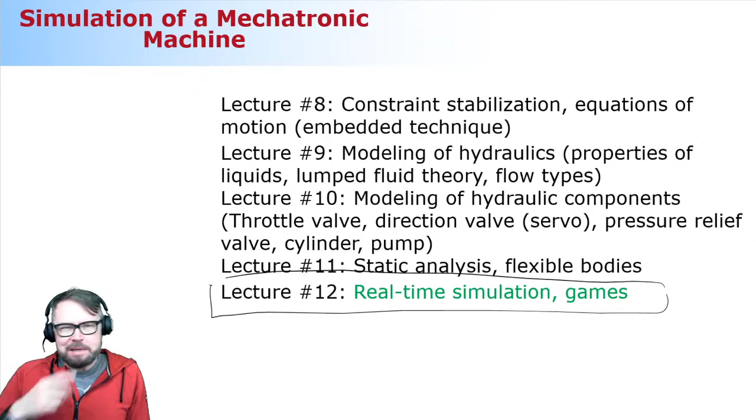Okay, with that, let's move on to a summary from last week's lecture.

Last week we looked a little bit at modeling of flexible bodies, and we concluded there are two alternative ways to do it. We can use a method that is not strictly part of flexible multibody dynamics theory, but is based on rigid multibody systems. This method is called the lumped mass approach, and as the title implies, it uses rigid bodies, lumped masses, connected together via spring elements. The spring elements introduce flexibility in all 6 degrees of freedom in a spatial case, 3 degrees of freedom in a planar case.

There are some examples showing this method applied to plates as well, but for plates it becomes very complicated because there are a lot of springs traveling back and forth with 4 bodies or 6 bodies like this.

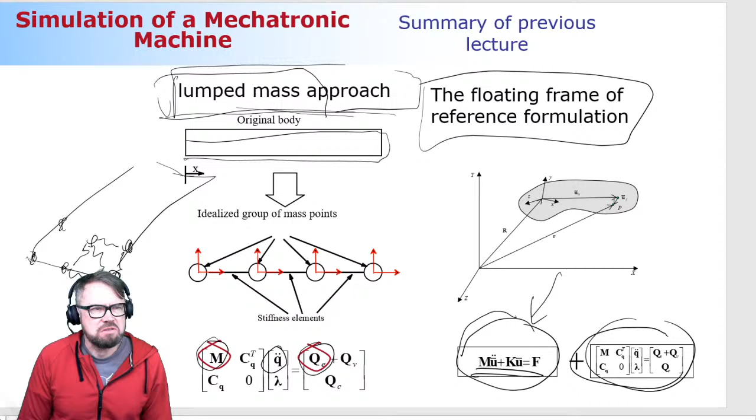Let's look at an example. Here is a beam-like structure. This is actually a hydraulic driven structure where this end is connected to a pillar body that is going downwards, and there is a hydraulic cylinder connecting the pillar and this flexible body.

If you look at the lowest deformation modes, frequency-wise lowest, they actually contribute quite a bit to how the system behaves. For example, if you conduct an eigenvalue analysis, you can see the frequency and corresponding eigenvector looks something like this - it's like a banana mode in common language. In a banana mode, this is definitely important, particularly because the system is loaded in this banana mode direction, since there's a hydraulic cylinder connected in this direction.

But when you look at another mode, this is an example where deformation is in the transverse direction. In this transverse direction, it's probably not that important for us because most of the loading will be in the direction where the cylinder is attached. For that reason, this may be a mode that you can ignore - maybe you don't need to worry about this mode at all, depending on the rest of the structure, but basically not necessarily so important. This next mode is in the same direction where the cylinder is connected, so this too is probably very important.

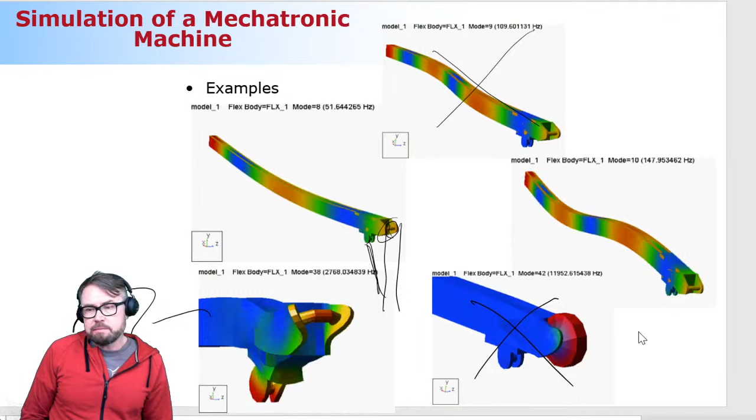This was a transverse direction, so you probably can ignore that as well. Maybe this one too. Just using a few modes, you can have acceptable accuracy - acceptable accuracy, and that's what we are after.

Recap - I have a recap, but I'm not going to get to that right away. First I want to discuss real-time simulation, but there's a practical matter, one practical matter.

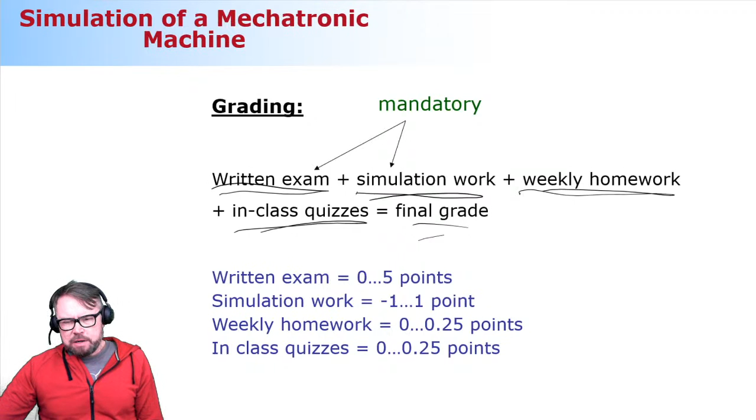Written exam, you can do in two different ways. You can participate in these 2 online midterm exams, which is what I'm highly recommending you to do. It was mentioned that the last exam is in week 51.

That's what I would like to change. I would like that to be in week 50. The reason is that if you have it in week 51, you will have a bunch of other exams, and maybe you don't have enough time and energy to focus on this exam. So I'm thinking the rescheduling makes sense. I hope you agree. If not, send me an email.

And if there are some difficulties for you to participate in these online exams, which I doubt, then the alternative - this is the first alternative. The second one is to go to the final exam. The first option is 17th of December, and then in February and in March. Those are the 3 options. Hope this is okay, and if not, let me know via email.

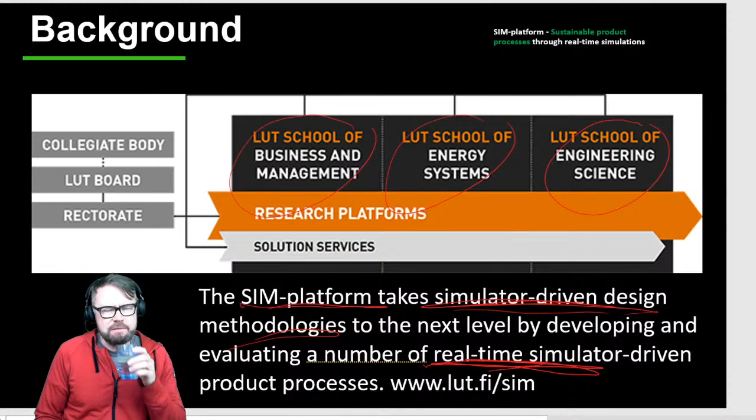This is a very pleasant topic to explain because it's very close to real life. So that's why I'm going to spend the next, I don't know, 40 or 50 minutes explaining what real-time simulation is all about and what this Sim Platform is about.

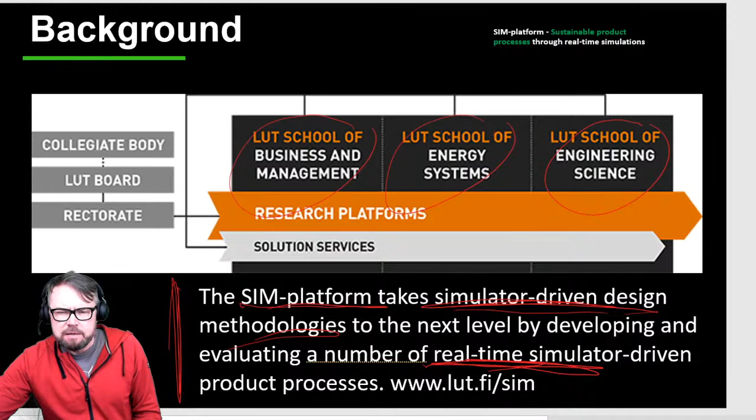Okay, so a little bit about background. This is heavily related to Industry 4.0, the fourth generation industry. The idea is that we have what's called cyber-physical systems - computer-based physics, if you want to cut corners. So the machines have their own understanding about how things are moving and what happens, and that typically is model-based. It could be some other solution too, but typically it's model-based.

If you look at the other generations of industry, those are things you're very much familiar with. Steam power, mechanical solutions - that's the first generation. Mass production, the Ford production line, electricity - that was the second generation. Computers and automation were the third generation. And now Industry 4.0 is cyber-physical systems.

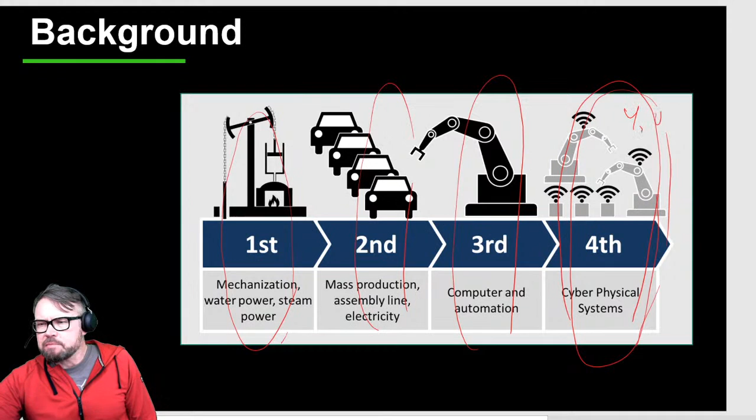So let me ask you this: Industry 4.0 is about cyber-physical systems, mechatronic systems, 4G internet connection, extensive use of electric drives - just what I explained to you. Game is on, so let me put it on Kahoot online.

Oh, it's up and running. Oh yeah, I can see that some of you already entered the answer. Let me see, game is on. 100%? So guesses are getting started from 100%. Come on, no, you can't - I don't think that's the case. So all saying 100%? I don't think so, I don't think so. There's a high temptation to make a bet that it's not 100%.

95, I like that. My guess is this: 95. You guys are all saying it's 100%.

So let me see how many students I have today - 56. What is going on here? So where are the rest of the students today? Let me see how many people are following the streaming - 65. But it should be 80 something. So where are the rest?

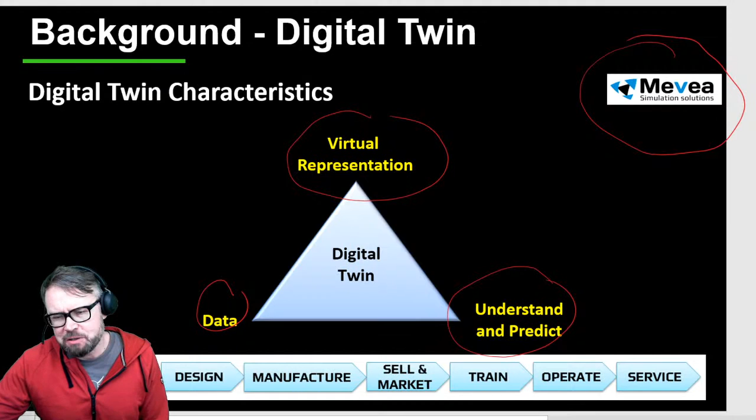Let me play the video for you and let me see how the voice is. Yeah, I hear the voice. Yeah, that's the problem, you don't hear the voice. It comes through my headset, but you don't hear it. Can I somehow fix it? No, I cannot. So you hear the sound? Oh okay, so you hear it, great.

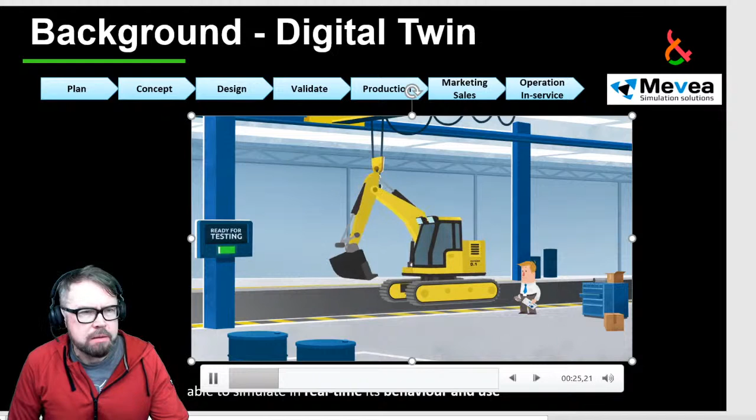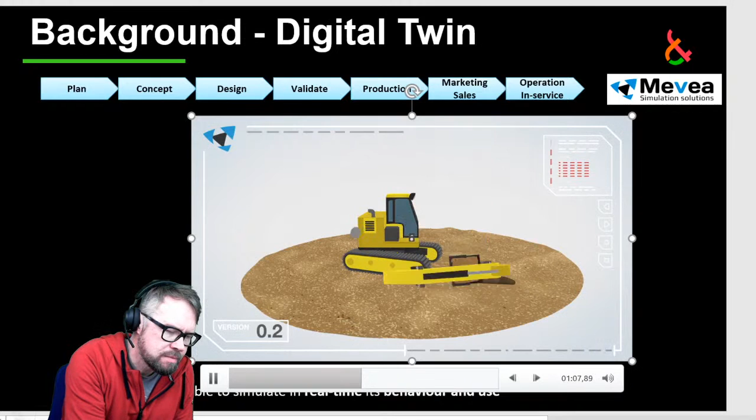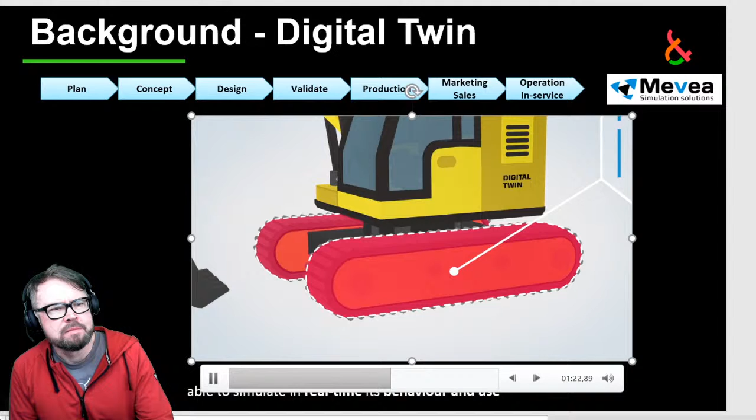Manufacturing machines can be a complex and costly process. Assembling the first prototype from parts that haven't been developed or tested together will often cause problems, and getting everything to function properly may require significant amounts of materials and effort. Nobody wants to be known as the manufacturer of poor and unreliable machinery. So wouldn't it be great if you could build your first prototype secure in the knowledge that it already has hours of thorough testing behind it? Well then, may we introduce you to Mevea. Mevea combines all plans for your machine into a single virtual model called a Digital Twin. This includes all the components necessary to build your machine, such as the interface to the real control system. The digital twin that is created is a virtual physics-based representation of your machine, capable of simulating its behavior and use in real time. The Mevea software simulates real-life physics, so the machine can be tested in different environments and on the actual tasks it's designed for. You will be able to detect potential problems before anything is even built. The digital twin can be inspected and modified when necessary, and stakeholders can also get involved in the development process at an earlier stage. The rapid development iterations that the digital twin enables will result in fewer prototypes, reduced costs, and faster lead times. Moreover, Mevea's solutions allow operators to use the simulation for training, which means they will be qualified to use the machine before it even exists. The digital twin lives and evolves throughout the life cycle of the product.

Once connected, the digital twin can analyze the machine's use and behavior in the field and provide vital feedback. This data can also be used to develop the product further. With Mevea's digital twin software, you can develop even the most intelligent and complex machines with ease, and change the way you engineer and operate your products. Read more about Mevea Digital Twin on our website.

Okay, so I take it you heard that, you were able to follow the whole story. That's great. I thought the voice was always coming to my headset, but obviously there's some secret technology that is passed by me. Anyway, so it says behavior and use in real time. Is that something that is useful for us?

Well, it actually is. We're going to look at how this behavior and use in real time can be applied in the different product processes or steps in the product processes. Those are the ones mentioned here: planning, concept design, more like product development tasks, validation, production, marketing, sales, operation, and service. Those are the things we're going to look at, what we can do with this real-time simulation.

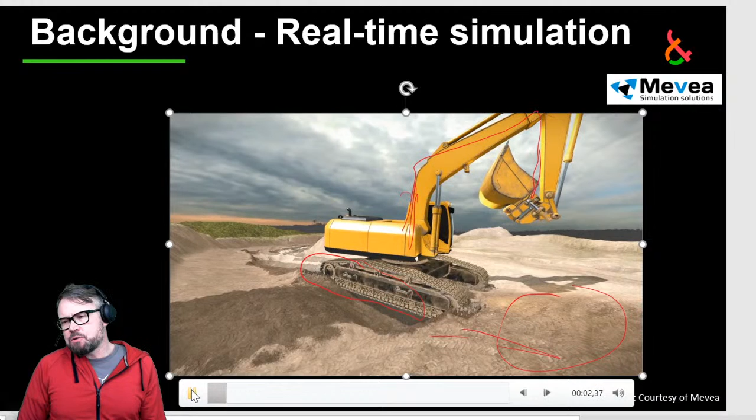This includes all the components you can find in a real machine. It comes with mechanical components, joints that are connected to mechanical components—no surprises, because it's multi-body based. Hydraulics, well, we know how to model the hydraulics. Then there are tracks, also based on multi-body system dynamics. Deformable ground, which is multi-body based. So everything is multi-body based. You just build all the necessary equations and solve those in real time. And the environment model, which this time is just this deformable ground, typically is a particle-based description, but let's see how it behaves. My drawings are a little bit disturbing, but let's see.

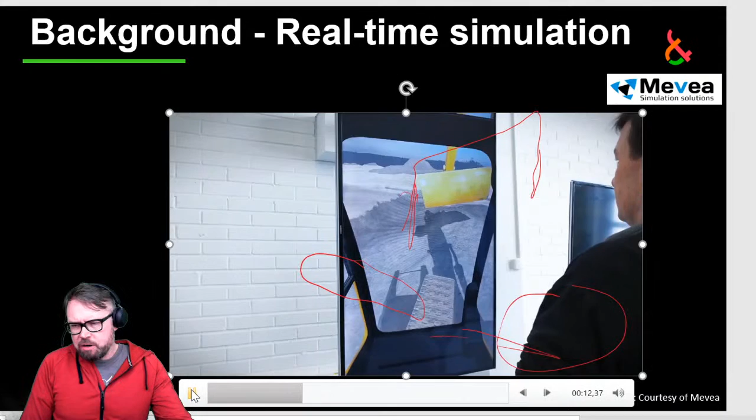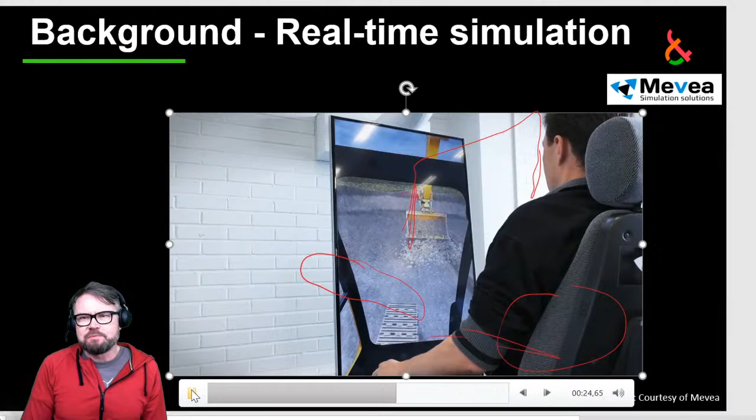Now, because the solution is real time, you can have an operator actually controlling the machine. This is very useful from many different perspectives. And what are these perspectives? We will get back to that soon.

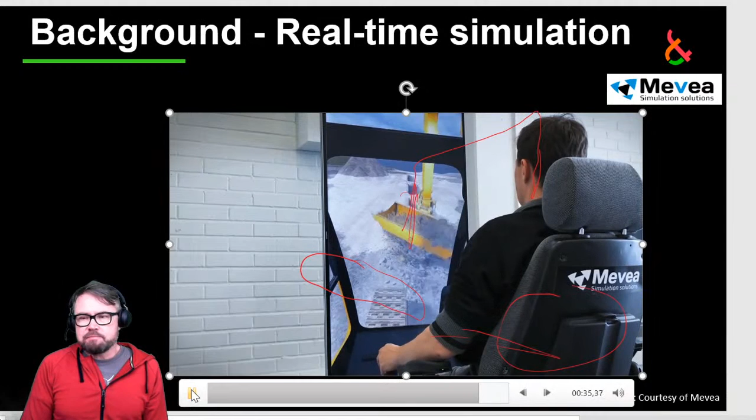There's a question in the chat window which asks: can companies build a Mevea model based on the CAD description? Yes, they can. They take a CAD description of mechanical components, combine them together, introduce the hydraulics, and that's about it. Then the model is ready.

Then, measurements from the field—how that works. I have slides on that a bit later, but it's something very exciting. We have sensors reading, say, acceleration from certain components. Those can be used as an input to our models, and the model then reproduces the motion that happens in reality. Why do we do it? Because the model gives us a full understanding of what's going on in the machine—an understanding about every single component, the full state, if you want to speak in terms of control engineering. And once we know the full state, there's a lot of things we can do with that. We can give extra information to the user, we can avoid misuse of the machine, we can use that in software development and testing, and so on and so forth. That's what we're going to look at a bit later.

So these environmental models could be based on a real environment, like this one here. I hope you hear the music. I don't speak if the music is on.

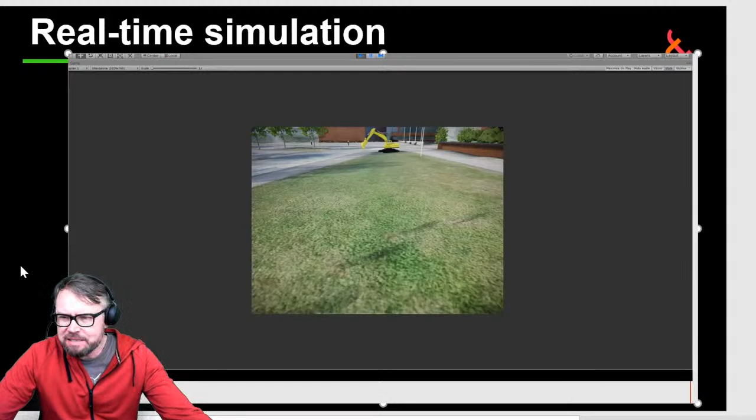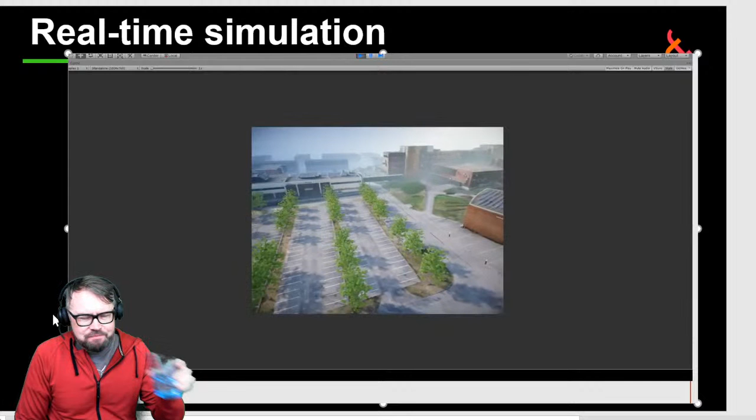Yeah, it's coming. No music this time. So do you recognize the place? Yeah, it is a university environment. This time the excavator is operating in front of the university.

So this too was made using photogrammetry, with drones scanning the environment. Once the drones are done, this is how the environment looks. Yeah, this is Skinnarila. So this is a virus-friendly way to visit the university, and it looks fairly realistic. It's missing cars and people, but it's an okay representation.

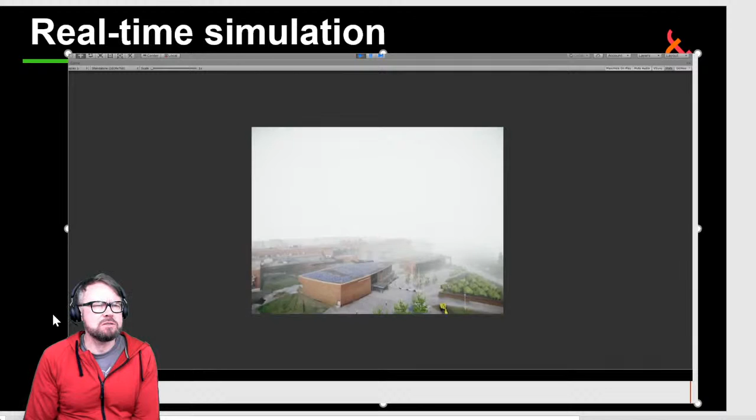Yeah, so maybe you can wave from your apartment window so we can take a look at where you are living. So that's a university environment, again photogrammetry based. Even though this is just an environment, sometimes it's extremely important, particularly when we're looking at industrial solutions, and sometimes when we really want to make a one-to-one model, including the environment. So these are sometimes definitely needed.

Okay, so the real-time simulation model, let me move on. I know I'm a little slow today. And by the way, now I have this. Okay, so one student is missing, but it's been missing already quite a while.

Is it still possible to change my answer? Because I would like to change my prediction to be 85. 85, oh, where did that disappear? Where is it now? Here, 85. And then I will get back to this comment in the chat window.

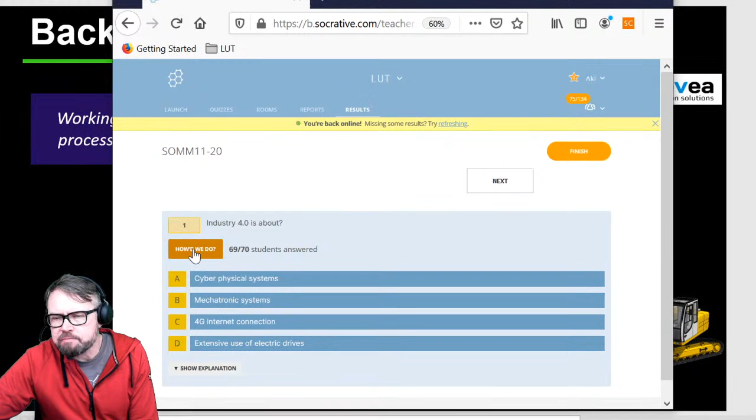Okay, so you guys ready? I was wrong, I was very much wrong. I thought that this... I'm surprised, very much surprised, because there is a high temptation to vote mechatronic system because the course is entitled as a mechatronic simulation of a mechatronic machine. Okay, but the success rate is very high. Not 100%, but very, very high. Good job.

Let me see if we got any winners. So the correct number is, well, I know it was 97, but now it's 96. 96, 97 doesn't make any difference. Oh yeah, so there's actually one winner. Let me see if there's anything else. Yep, yeah, just let me see, one winner at least.

It would be so nice to announce the names of the winners, but it is what it is. Seven, that's it, that's it. Just the one winner.

So then, yeah, 86 is okay, so I might make that as a... So that's going to be considered as a winner as well. Two winners this time.

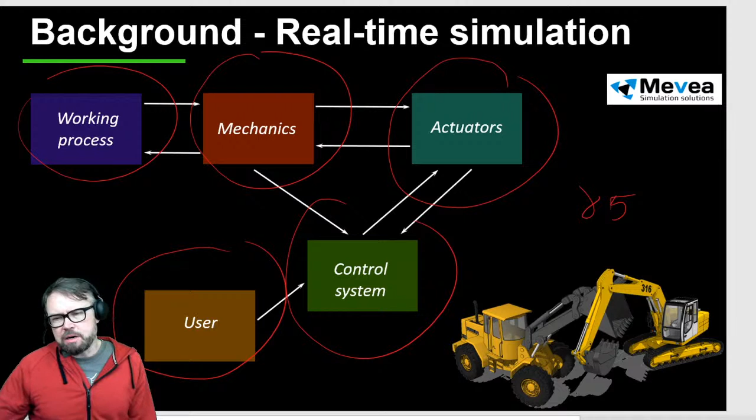So then finally, let's move on to these numerical examples, these product processes that I'm going to take a look at. I'm going to look at the product processes, product development first, then one case from marketing, which is actually focused on user training. Then we're going to look a little bit at the service business, that's where we can actually use these measurements, and we can enhance measured signals using the simulation models.

And then new business opportunities — we're going to take a look at how artificial intelligence could be combined with simulation models. One thing I have no example for, but is important too, is that it helps people communicate. It gives a common language. So the simulation could be considered as a common language, so specialists making hydraulic circuits and hydraulic designs can understand what is going on in a mechanical design. So those are the things that help.

So we thought that this kind of course and this kind of game-like environment would help people to appreciate the mathematics. I'm not sure about that, but it was more like dreaming rather than anything else.

Okay, let's get started from the product development, and let's see how we can use real-time simulation in the product development. The first thing, and the first important observation, is this.

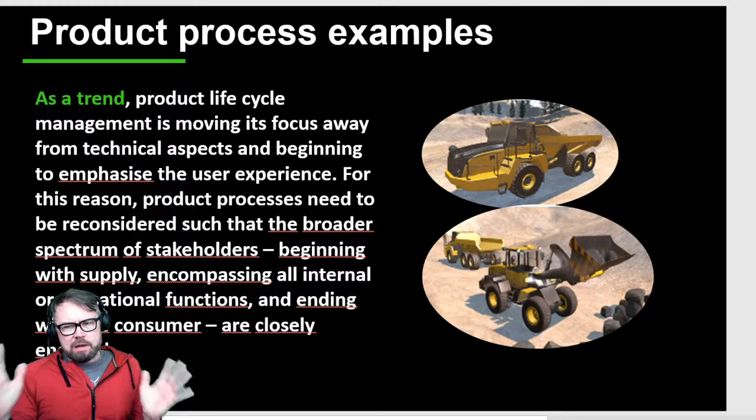The concept is this: in conventional product development, we have a product development team here. The purpose of product development—this is my interpretation, and what I'm going to ask in my next in-class quiz—is to serve the customer as well as they can, to fulfill the customer needs. That is what they want to do. So the crucial step here is to understand what the customer wants.

That's not easy, because sometimes customers don't have a technical background and are unable to express their desires in technical terms. They could say they want something that is solid and feels good, but have no idea what that means in terms of technical design. So product development tries to figure out what the customer needs and how they do the work.

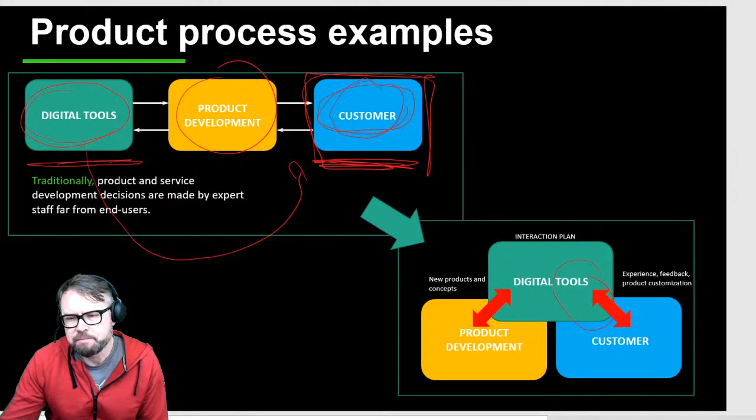And then product development can come into play and fulfill those needs. That's the whole reason, that's the whole game. So here's a little example. We built a simple game, an excavator game, where the user can modify certain features of the excavator, changing the hydraulics a little bit, and figuring out how the different buckets behave.

And then there is a competition to load this industrial hopper as fast as you can. So we're monitoring the productivity. That's a simple game which helps get a better understanding of what the customer wants and what is the most optimal solution in terms of productivity.

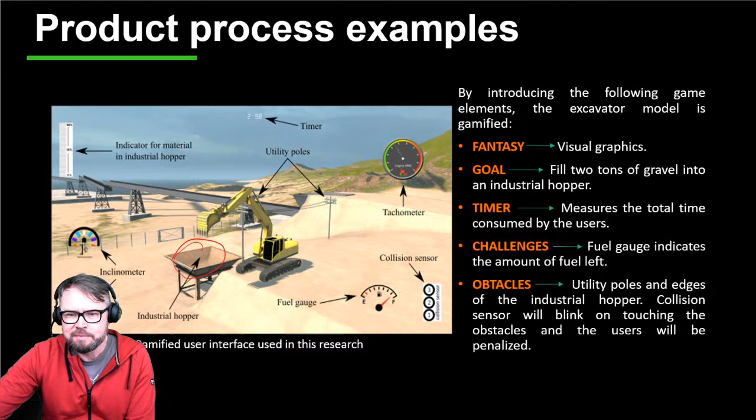So selling services and products, that's what it is. Good comment. Okay, these are the features you can modify, but my next in-class quiz is this.

Okay, actually today we have 71 students. That's a good number. That is an amazingly good number, because I was expecting that this is the last lecture so we'd get like 7 views. But 70, 71 is a good number. So I'm very proud, not of myself, but of you, because this is for you, definitely for you.

And again, the game is on and the guesses are 100%, which I don't think so, because look at the options. It's not that simple. And while you guys are guessing, let me proceed in my explanation.

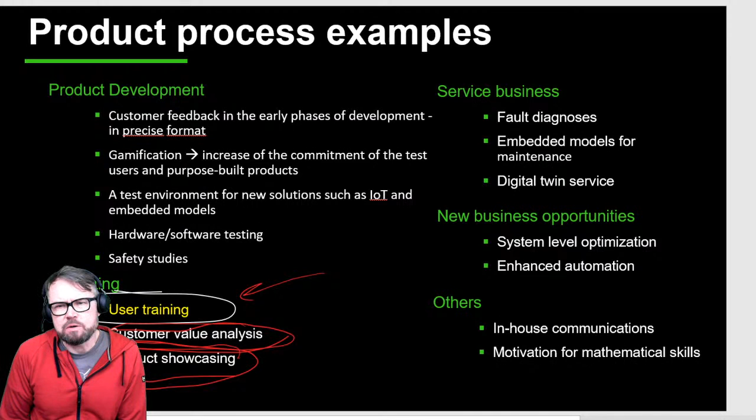So we're going to look shortly at user training based on a real-time simulation model. I'm going to play you one simple video. This video is, let me think, 17 years old. So 17 years ago, it was possible to make real-time simulation models like this.

Look at the environment, looks okay. The purpose of this model was to train operators of that crane. I clicked something accidentally. To move containers from harbor to ship and ship to harbor. It was all physics-based, no hydraulics involved, but the idea here is to show you that this was possible 17 years ago. So think about how they look at the moment.

Well, more sophisticated. But the visualization is okay, not outstanding, but it looks semi-realistic, let's put it this way. Some of the features are kind of clumsy, like the wire rope models are not so great. But obviously they will do the job, because this is being used to actually train these operators to use this crane.

So it's doing the job. Okay, user training, that's definitely used in flight simulators too. That's definitely common practice.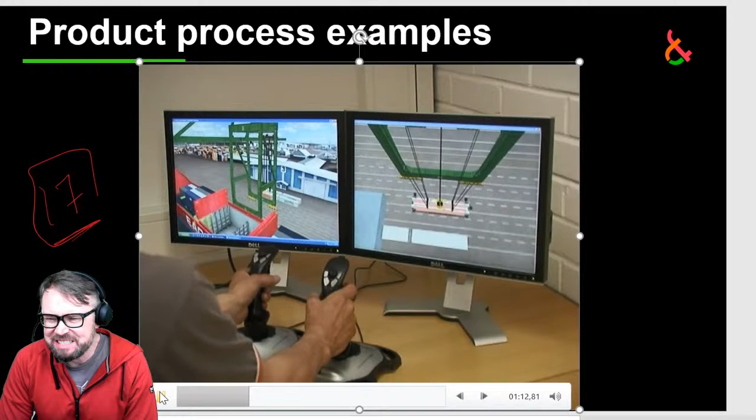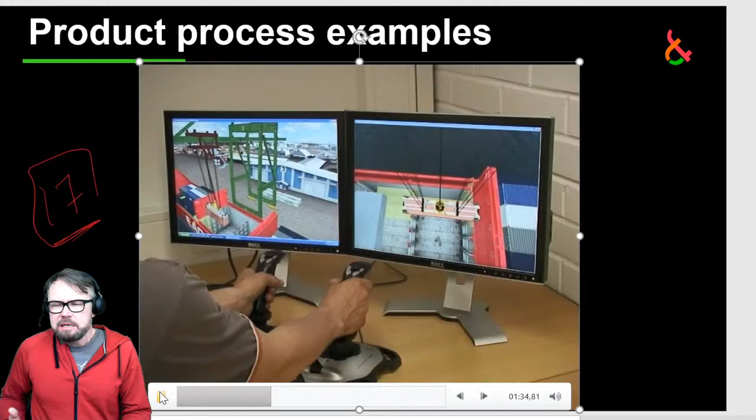Flight simulators are also physics based, because if training simulators are not physics based, if they're just like animation, it makes no sense. Similarly, they do this in Formula One too, and those are physics based as well. So you can build the one as well. You're right about that.

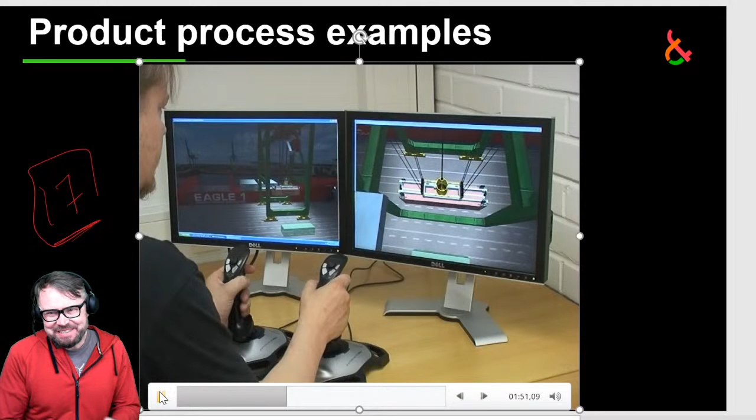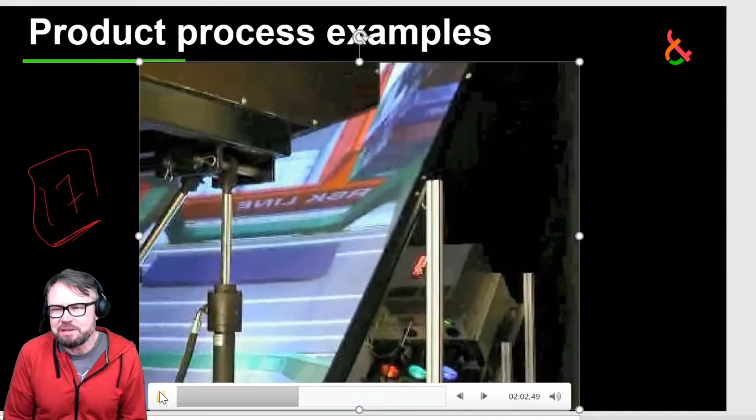The joysticks you can see in this figure are not the latest model. This is an environment where operators actually practice using this simulator. Look how heavy duty it is, with huge hydraulic cylinders. Motion platforms are no longer made like that. The screen is made such that you're looking downwards, like you would in a real case.

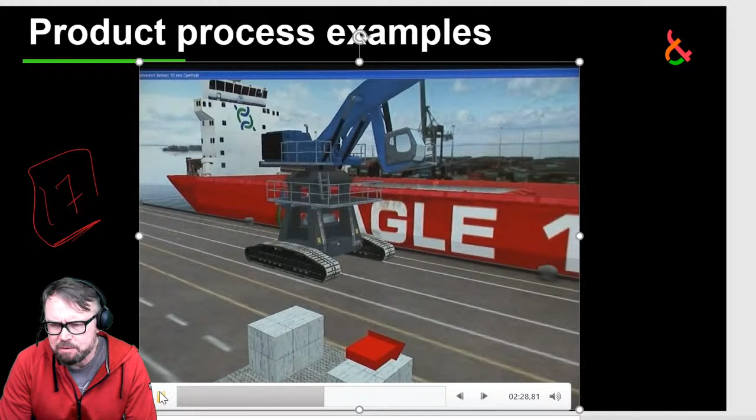This is another machine. I think this model too is about 15 years old. The idea was to move these boxes, piles, from harbor to ship and then back and forth.

Let's look at the contact models, how they are. And then we're done with user training.

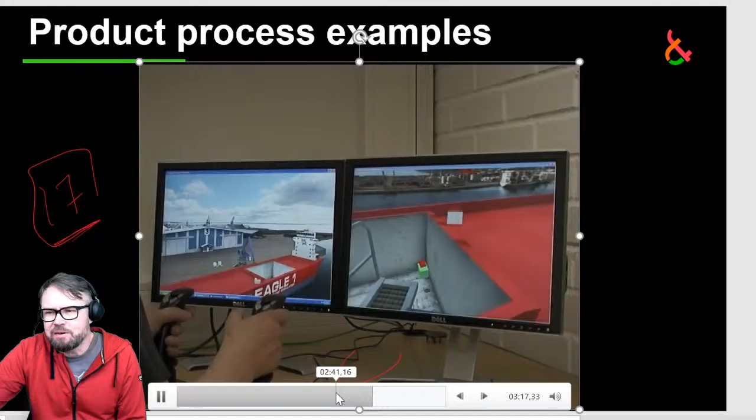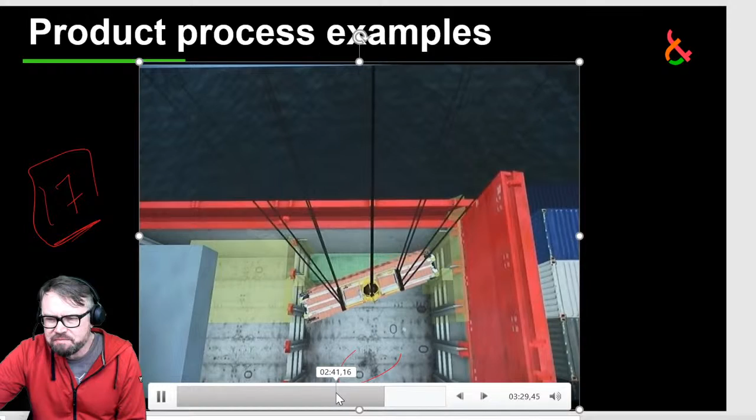So this guy did not pass the test. Same here. I don't think the purpose is to load the ship like this. I doubt it. Let's see. Oh my God, not good. So this was full of flat TVs, now they're all broken.

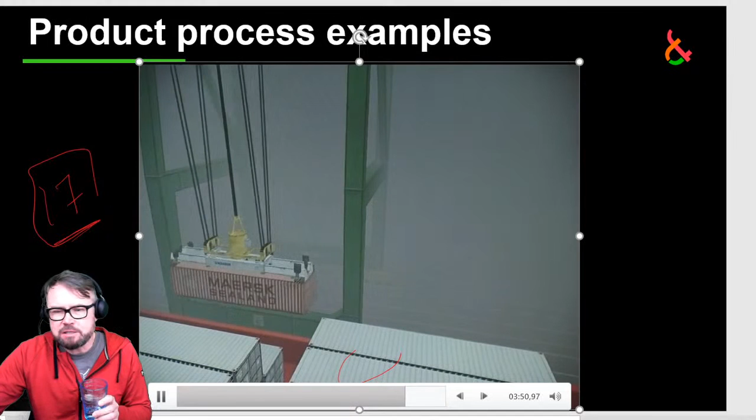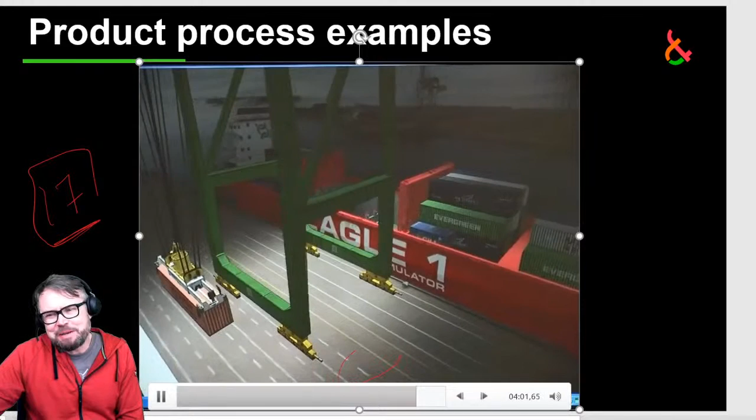You can change the weather condition and so on and so forth, so that's one option, one thing you may consider to do. Or maybe there was a Maersk container.

It's a lighting condition. So let me just go and get a little bit more water, and I will be back with you.

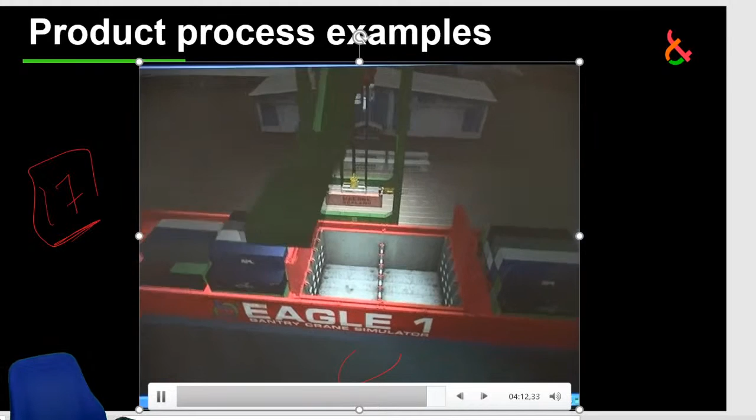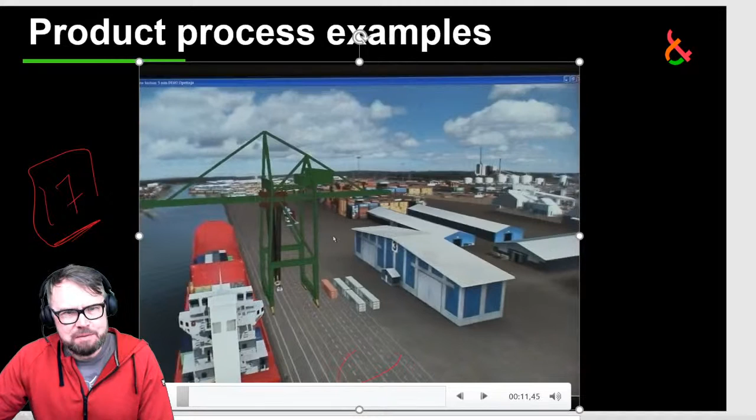I see that my water consumption is very high, but the reason is that what I'm doing day in, day out is talking, talking, talking, and Mondays there's a lot of talking. When it's getting late like today, it's kind of hard to keep my voice up, so that's why I need that much water. Sorry about that, so I keep on drinking.

But let's move on to this thing that people already asked: how is this possible? This is a matter related to fault diagnosis, embedded models in maintenance, or for maintenance, and digital twin service. So what's the idea here?

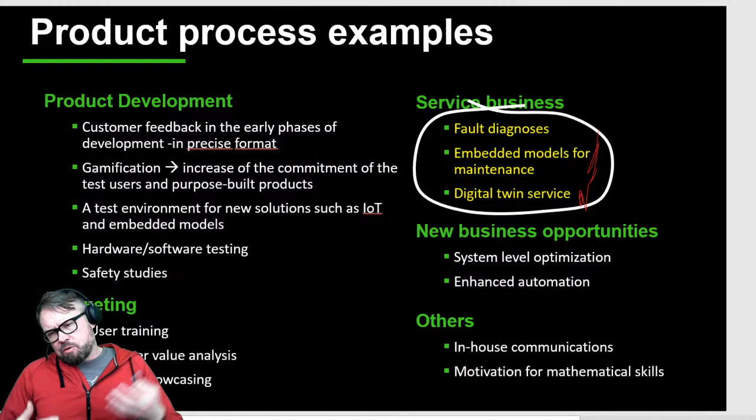The idea is simple. You can get the data from the measurements, and use the data for a number of different purposes. The one simple, obvious thing you can do with the simulation model is build a library of symptoms. You can introduce different kinds of faults to your models, and see how the machine behaves if this particular fault takes place. Based on these symptoms, you can have an extensive library that you can teach to artificial intelligence to detect what's going on in your system. Then once you get the signal from the field, from measurements, you can compare whether or not these symptoms correspond to a certain failure mode.

Here's just an example, it goes in such a way that—let me make the voice a bit lower—here's the hydraulics, and look at how the hydraulics is modeled. This is modeled using these drawing symbols, and that's a very modern way to model hydraulics. You simply put the different kinds of symbols in a panel or a screen, connect those by hoses, and then your hydraulic circuit is ready.

And you can even visualize it. You can see when you're moving these direction valves back and forth, how they connect different ports, and that helps you measure the pressures in different locations. Now we could simply break some of the hoses, introduce some faults, and see how the system behaves. These are, of course, very unrealistic cases, but just so you can get an idea.

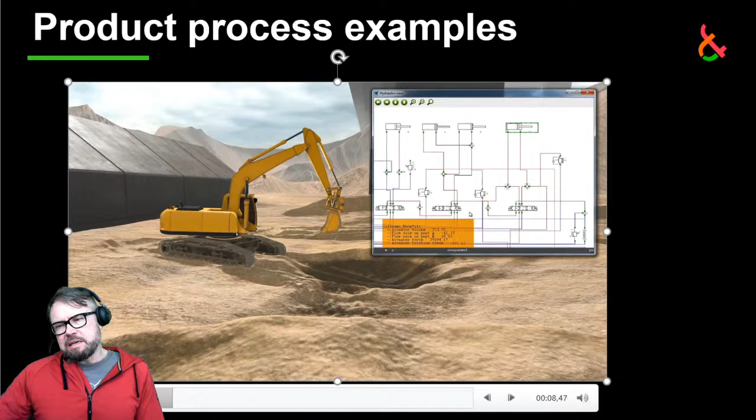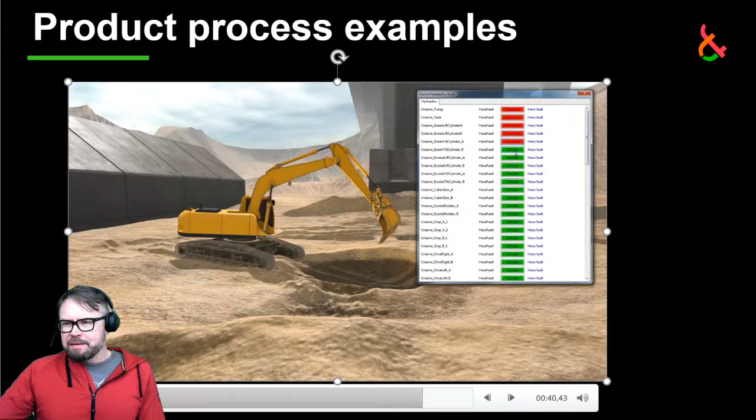So here's when the hoses will be broken, the behavior becomes a little bit weird. Now it goes like that—more hoses will be broken. Now this is back in operation, back in live. And now it's completely dead. Okay, it's just a simple idea of what you can do with simulation models.

But the interesting thing is this: if you can use a measured signal as an input to a model, then you can use your model to dive into the machine and see different interactions and see how the machine actually performs. And that's possible too—that's what we're doing at the moment, research-wise. So again, the idea is this: we have an actual machine.

So we have a real sensor, and this sensor could be a pressure sensor, an accelerometer, or a position sensor. And then we have a simulation model that is as close a representation of reality as possible. It's never going to be one-to-one the same, but that's okay because it doesn't necessarily need to be.

What we're going to do is have the same measurements in the simulation model as in the real system. We look at the difference between these measurements, and that difference goes to a system based on Kalman filters, state space observers. Those are the ones correcting the solution, and once corrected, we add that to our actual model solution, and then we get an estimate.

This estimate is what we can use to dive into the machine and see how the different reactions are, how the forces applying in the machine are. So we can even use this technology to measure the digging forces in an excavator, for example, without using a force sensor.

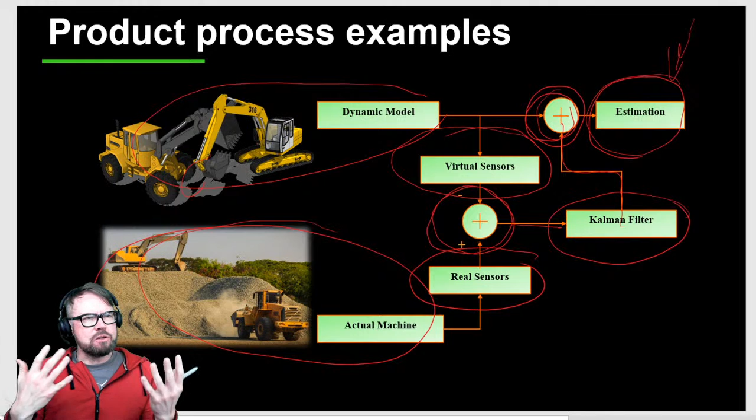That's something very exciting, because first of all we can lower the amount of sensors. We can get this indirect information that could be force-based or pretty much anything you want. We feel this lets us offer additional information to users that would otherwise be impossible to get.

Here is a hydraulically driven four-bar mechanism, but we are estimating the forces produced by hydraulics using this virtual sensor technology, or state space observers—I don't know the correct name for this technology, but something to think about. These are both model-based, so multibody dynamics becomes quite handy.

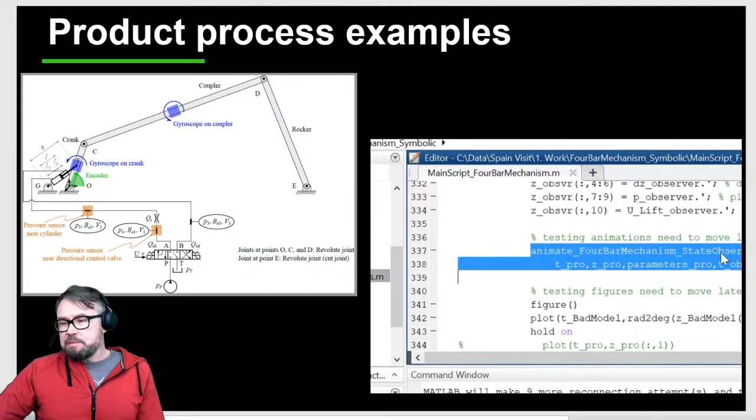What about this—a new system level optimization, enhanced automation. In enhanced automation, one of the most exciting things at the moment is the use of artificial intelligence. The problem with artificial intelligence is that it needs a huge amount of data.

Producing this data using measurements is possible, but it's not very straightforward. So we've been using these physics-based models to train neural networks and AI-based solutions. With that, we can make systems more or less automated. That's quite exciting.

There's another, maybe even more important point of view. Right now, with these complicated real-time simulation models, most of the time that happens inside the computers is that they are waiting.

Now I see that I have a streaming problem. I guess that I'm back. I'm back. Okay, so most of the time they are waiting.

All these equations are solved, and then they wait. What are they waiting for? They're waiting for real time to hit the same spot. Then they can read the signal from the joysticks or other sensors, and proceed in time again. Then they wait, then they do the computing, then they wait. So it's quite a bit of waiting. And think about what happens if they don't wait.

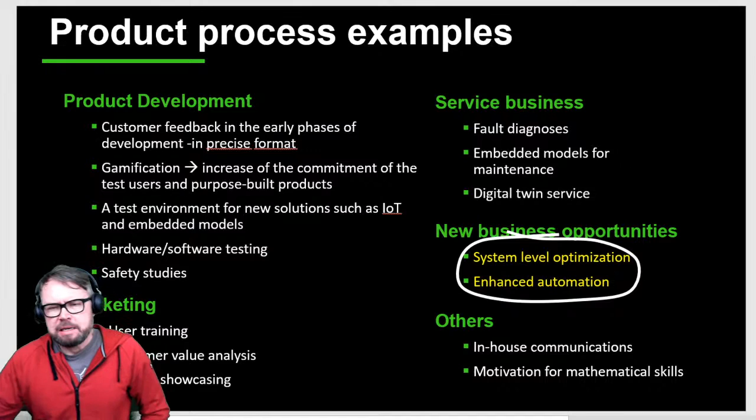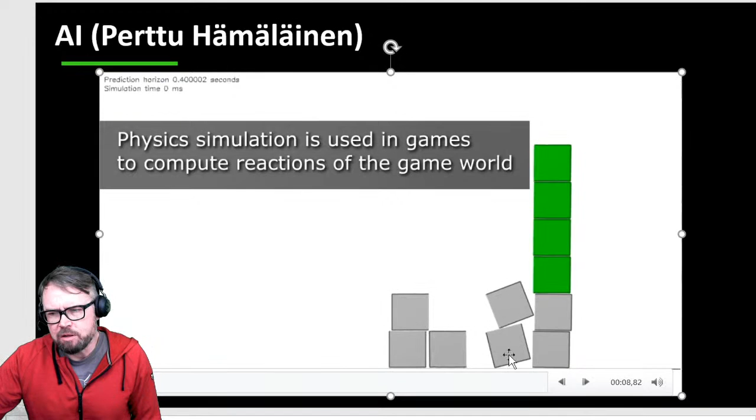Let's take a look at an example. Our colleague at Aalto University is helping us with this. This is a predictive simulation. Just to get an idea of what a predictive simulation is: here's a kind of Angry Birds game, and the idea is to move all the boxes. You can beat the game if you know what happens in the future.

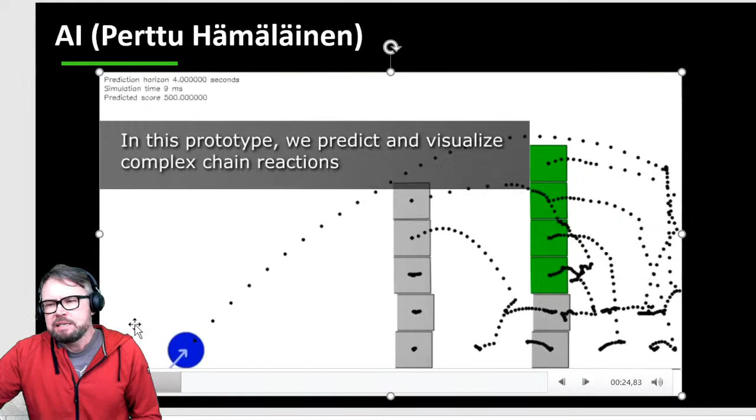Now computing 1,000 times faster than real time, you can see the consequences, what happens in the future. And when you see what happens in the future, the game becomes ridiculously simple. Another example is... okay, let's skip this one.

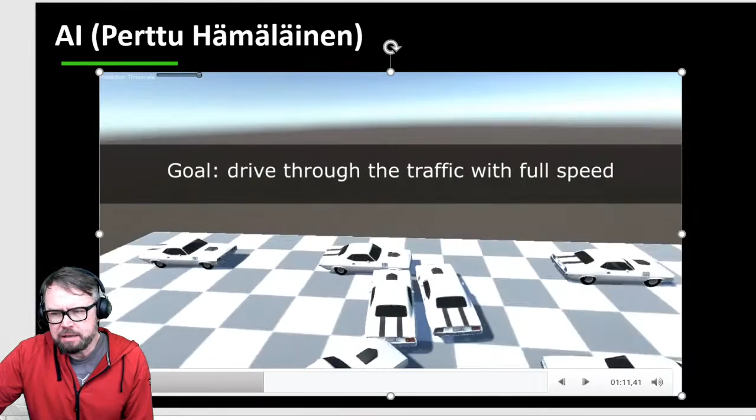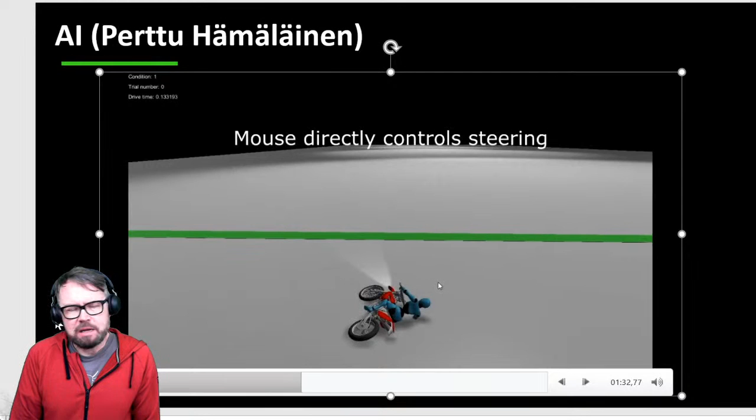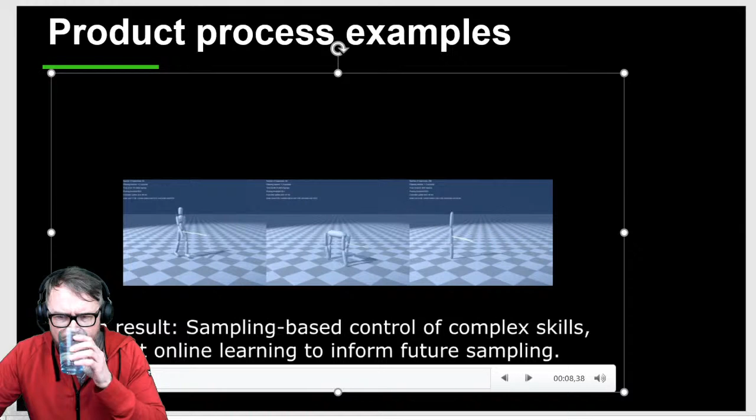Here's a bit about what machine learning can do for you. They're taught in different ways; one idea is to make this human representation walk as stably as possible. Let's see.

Let me take this, here it is. This is where things get started. This is the first attempt, and it looks like this guy is doing okay, but is heavily drunk. Now, once this learning method is added, it starts getting stabilized. Look at this, after a little while it's getting much better.

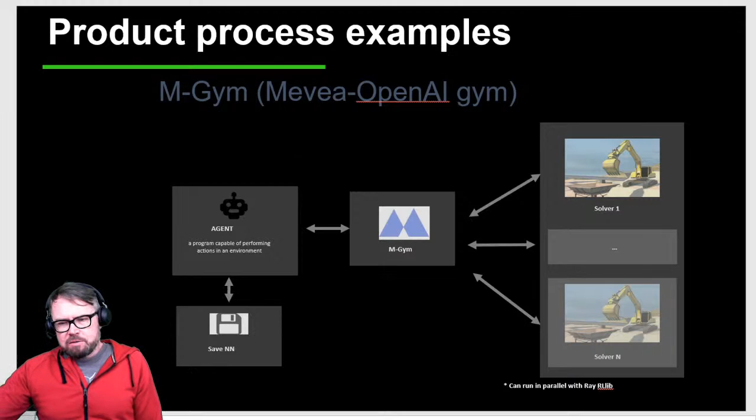Same concept coming from game technology, but we'd like to use it in multibody system dynamics. Here we have an environment called M-Gym, based on OpenAI Gym, used to apply different kinds of artificial intelligence algorithms to control different multibody-based models. I'm running out of time, so I'll skip some examples and just show how the excavator behaves.

In this excavator, there is no human interaction, no human is touching this. Everything is based on a physics-based simulator and artificial intelligence. It's capable of doing the job, because the job is to move dirt from the ground to this industrial hopper, so it's obviously capable of doing it.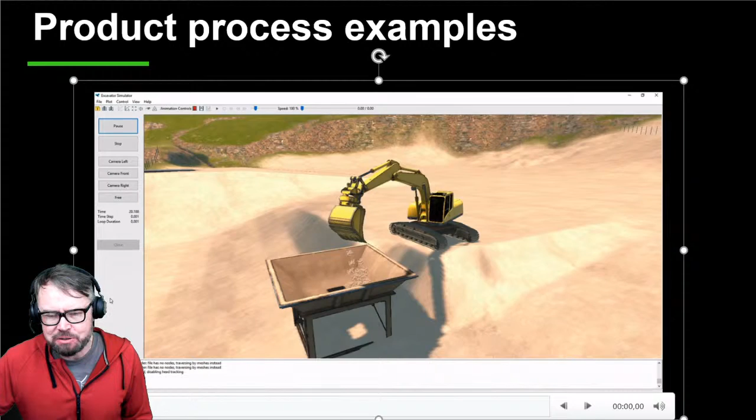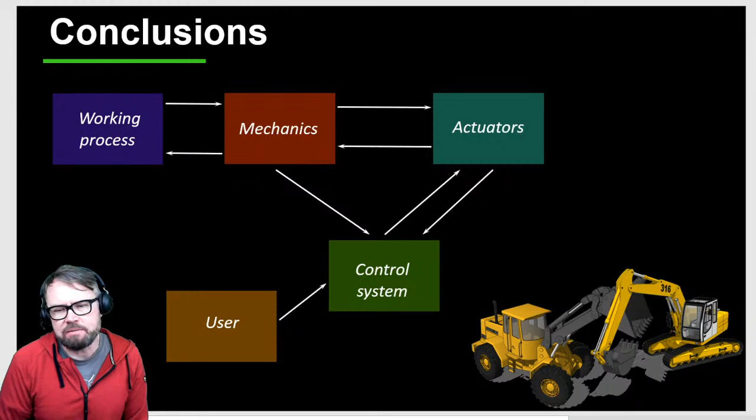Let me conclude this topic because I still need to explain what you can find in the next midterm exam. So the conclusion is this: real-time simulation is all the same thing. So are all these boxes still needed? We're simply going to synchronize all these boxes and all these solutions to real time, and that's going to do it for us. If you want to learn more, here's your way to do it.

Look at this. You can log yourself to the address lut.fi/sim. That's where you can learn more material about the sim platform.

These are the two courses that I'm delivering. Only 2 courses: the one you learned already, and another one that will be in the next semester, starting from January.

So yeah, I know that you guys are excited that you are scoring so well. I would love to offer you a beer, but the university is in remote mode at the moment. Didn't you get the message from the rector? He said no teaching, only urgent teaching in the university anymore. But anyway, winner, next time if we see each other face-to-face, I can offer that to you.

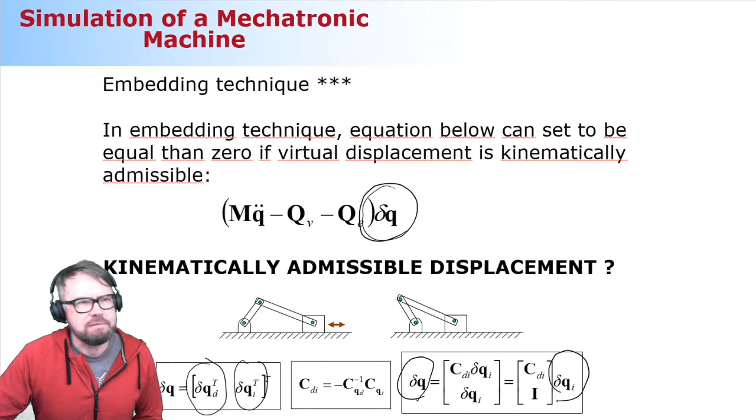So then you will do the final thing, which is expressing the acceleration also by using independent accelerations only. That's going to be your equation of motion.

Okay, so I see that my camera is now completely done, so it's no longer... oh yeah, it's still moving. Seems to still move, but it's lagging, like no limit.

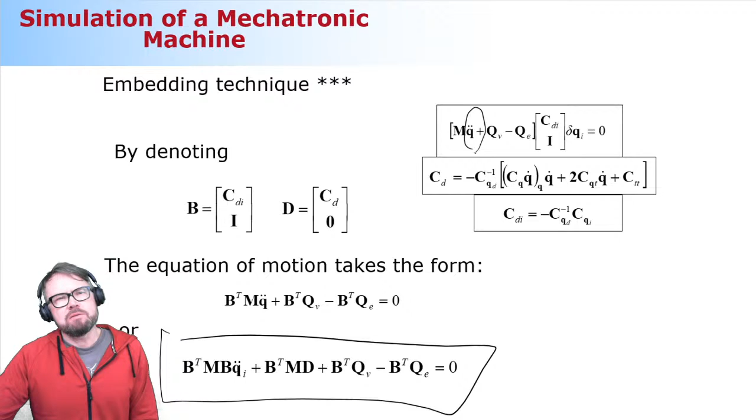Okay, that's embedding technique. Hydraulics: properties of fluids, lumped fluid theory, flow types, modeling of hydraulic components. Those are the 4 things that I'm expecting you to know.

Properties of fluids: please focus on the bulk modulus. Viscosity is good to know, but don't focus on that subject matter. Make sure you understand the bulk modulus, and make sure you understand that it represents the flexibility.

Flexibility. Okay, so there is still a connection problem. No.

Okay, I don't know, I got no complaints in my streaming window. It says excellent connection. It seems that the camera is the one that is now not cooperating this time.

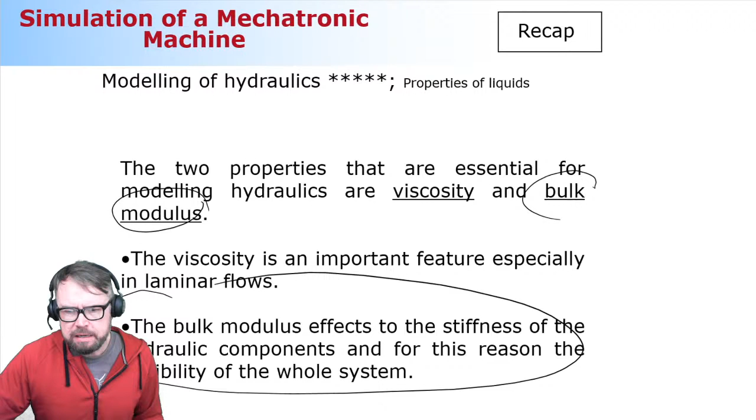Okay, the bulk modulus, please focus on that. How it goes in detail: you're looking at a system that consists of a number of containers. Using this number of containers, different containers, you can compute something called effective bulk modulus. That describes the effective flexibility of fluid and containers. That's something you definitely need to know.

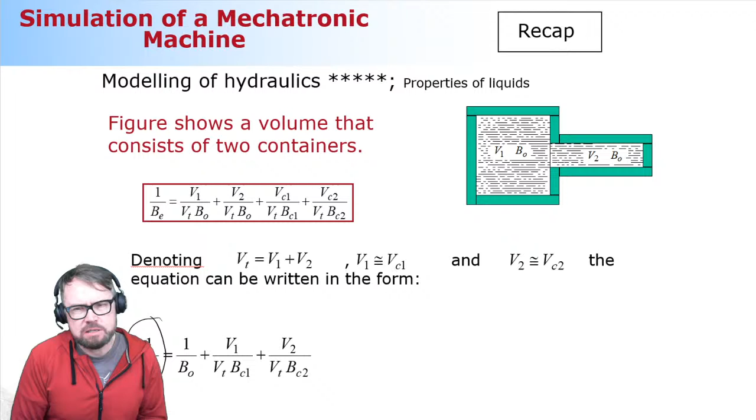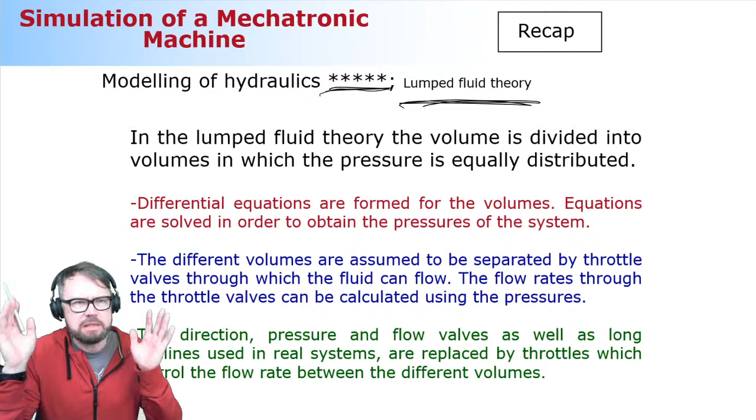I see there's a comment in the chat window asking if this material is coming to Moodle. It's going to be coming to Moodle, but not coming early - I'm going to upload it this evening or tomorrow morning at the latest.

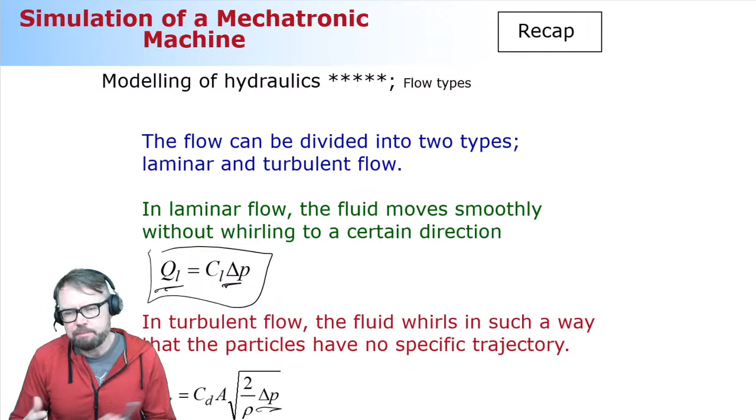Then the different kinds of flow types: we deal with laminar flow, where the flow rate and pressure difference are linearly related, or turbulent flow, where these two items are quadratically related. How that goes in practice, in different cases, depends heavily on what kind of system you are looking at.

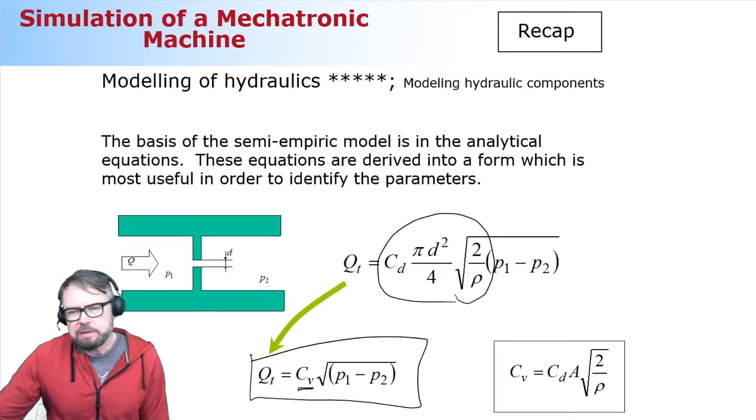Modeling of valves: we use a semi-empirical approach where we start from an analytical equation and convert it into a form where parameters can be obtained from the manufacturer's catalog. That's what it is, simply talking. And we look at direction valve, and a little bit about the pump and the cylinder. Please take a look at these things.

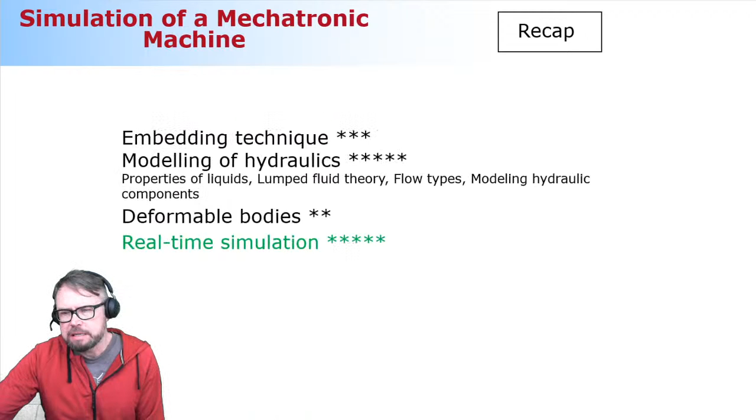Deformable bodies, we concluded already earlier today, in the beginning of today's lecture. And the real-time simulation - try to keep this picture in your mind, the idea that real-time simulation can be applied to a wide variety of product processes.

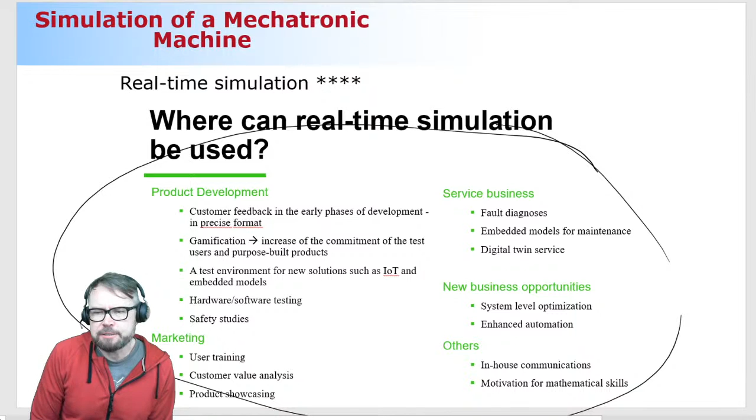My last slide is this. Hope to see you soon in another course called Simulation Laboratory. This is a course that I like a lot, because here we're going to speak about the practical applications and what it means when we can do these really nice simulation models. We're also going to learn one theoretical matter, related to the description of flexible bodies - how flexibility can be accounted for, and a little bit about contacts, a little more about real-time simulation, and a bit more about this and that. It's a mixture of things, but I like it a lot - that's in my mind, a great course.

Okay, I see I have about 2 minutes left in today's lecture, but you know what, I can be flexible, an easygoing guy, and I can even close earlier than 5:45. Let me see if there are any other comments.